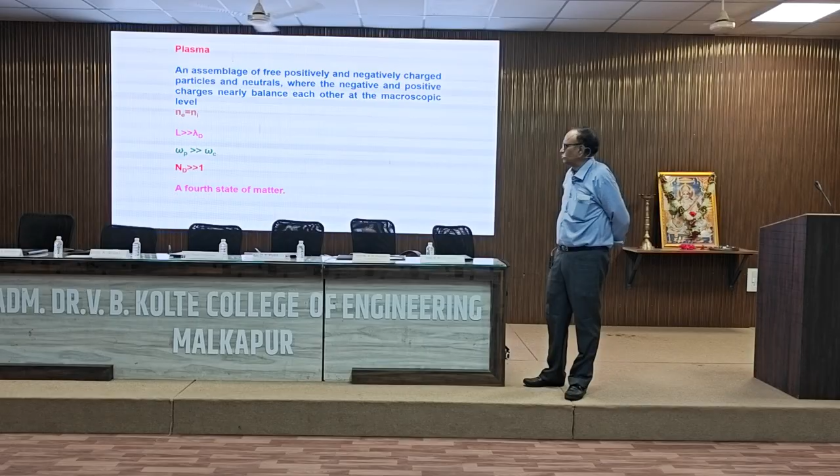We call this removal of the electron from the atom an ionization event, which most of you have studied in your 12th standard. Ionization is basically removal of the outermost electrons from the orbit of the atom. When you generate these electron-ion pairs, one ionization event gives you one electron and one ion. So the number of electrons equals the number of ions, that is Ne is equal to Ni. Ne is the number density of electrons and Ni is the number density of ions, and they must be equal.

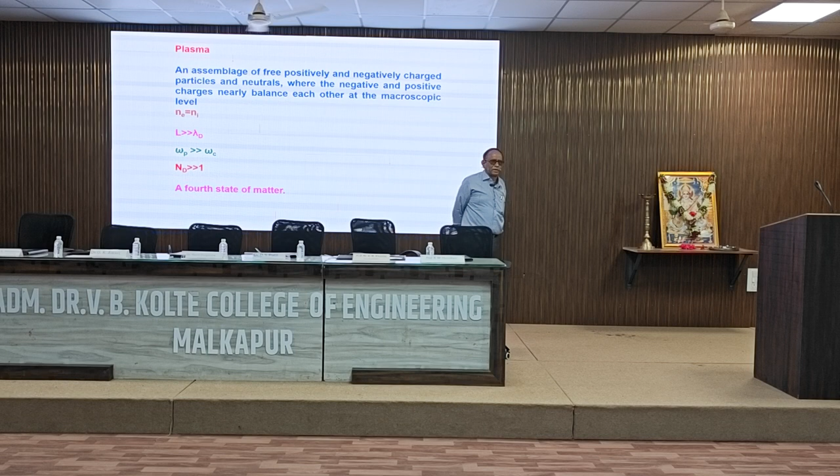Again, we are not talking about a few electrons. In one atmosphere we have 10 raised to 19 particles in 1 cubic centimeter. So when we talk of ionization even at low pressure, reduced from atmospheric, we talk of 10 raised to 12, 10 raised to 13, minimum 10 raised to 10 electrons per cubic centimeter. So a very large number of electrons and a similar number of ions. And when ionization takes place, not everything is ionized. A very small fraction of the atoms are ionized, and a large fraction is still unionized.

So what have you got? You have got electrons, ions, and neutrals. And all these particles are colliding with each other. When they collide, they transfer momentum from one particle to the other. There may be some recombination, there is energy exchange. From the two-body collision problems you studied in your 12th standard, you might know that when particles of identical masses collide with each other, they exchange their momentum completely.

But when electron, I just take example of hydrogen atom. Hydrogen atom, see, it has one proton and one electron, okay? And proton mass is 1800 times more than that of the electron mass. So ion is going to be 1800 times higher mass than that of the electron.

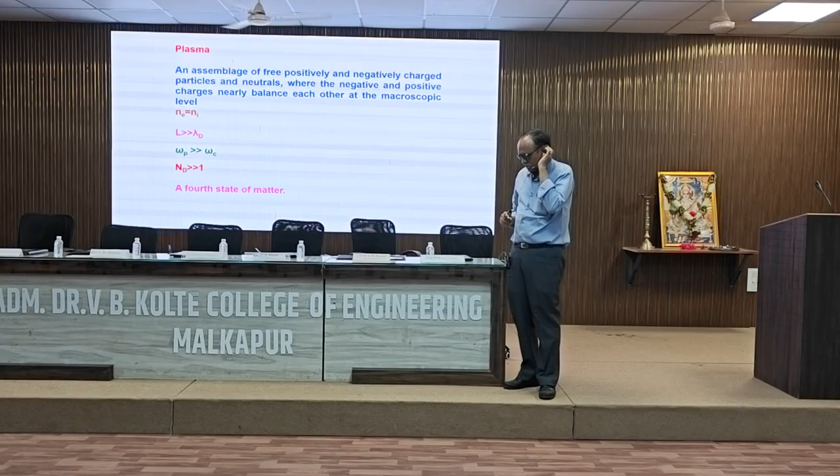Now when this light electron, it is having some energy, but when it collides with the heavy ion of hydrogen, it transfers very small fraction of the energy, and that is evident from the two-body collision kinetics. And at the same time, there is a continuous input of the energy. Now, from where is this input coming?

Now I will come to what is plasma. If you see the popular books, you will see that plasma is defined as the fourth state of matter. What is the first state? Solid. You put energy into solid, it will become liquid. If you put more energy into that, it will become gas. When you put more energy into that, the gas will be ionized.

Simple is like you take ice, water molecule. It is at low temperature, it is solid. You heat it, it becomes water. After that, it becomes steam, and you go on dumping energy into that. It will go into hydrogen, oxygen, hydrogen ion, electrons, and all sorts of things. So this state of electrons, ions, and neutrals is nothing but your plasma state.

Now this plasma state has to have certain conditions. As I told you, we are talking of, in 1 cubic centimeter, even though the degree of ionization may be less than 1%, almost 10^8 to 10^10 electrons, similar number of ions and remaining neutrals. So all these particles now behave collectively. Electrons are lighter mass particles, ions are heavier particles. So electron cloud and ion cloud oscillate with respect to each other.

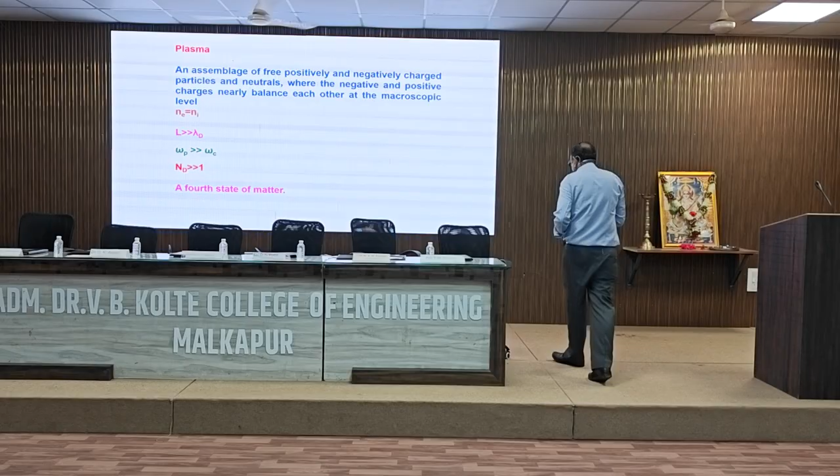Perturbation means in terms of potential, like putting some electrode onto which you put some voltage. If it is negatively biased, it will repel the electrons and attract the ions. If you put positive potential, it will be surrounded by the electron cloud, and the effect of this positive potential will not be felt by the remaining plasma particles. So the length of the plasma medium should be very, very greater than the perturbation length, that is lambda d. I think this is not working.

Lambda d is the perturbation length. Then plasma frequency, that is the electron cloud oscillating with respect to the ion cloud, should be very, very greater than collision frequency. And if you take a sphere of radius lambda d, the number of particles in that sphere, basically electrons, should be very, very greater than 1 for that shielding to be effective. And again, it shows the collective behavior.

That means if in this room we have the plasma and something happens in that corner, the effect will be felt there. Because now you are talking about a charged particle state, where you have electrons, ions, excited neutrals. Why have they become excited? Because of energy transfer from one particle to other particle. And in this process, the charged particles are moving, so they generate electrical currents.

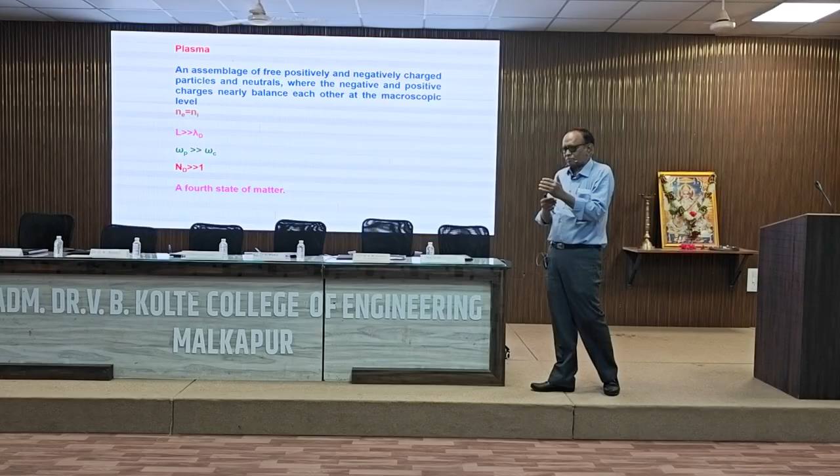When there is an electrical current, that is associated with a magnetic field. So basically, you are ending up with the electromagnetic field in the whole plasma volume. So these particles move under the influence of this electromagnetic force, and they behave in a collective manner. That is evident from these parameters I defined, plasma frequency and all these things.

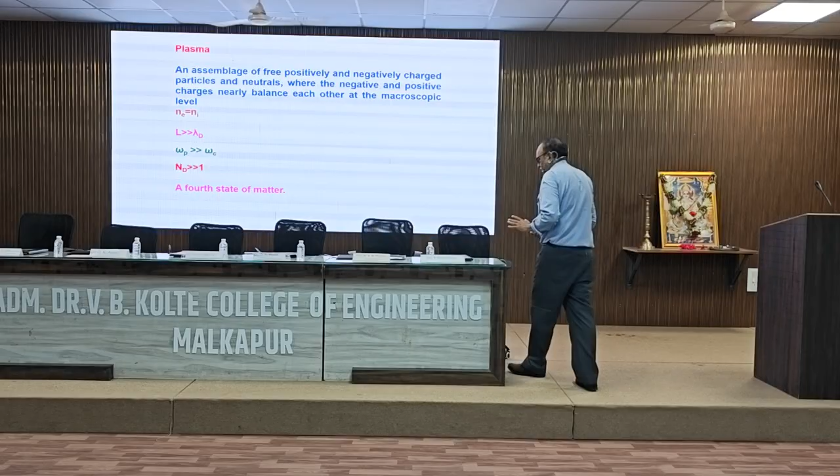Now I will come to these plasmas. The simplest example that I can give you is the plasma that is generated in your electrical tube light.

Because you have the two electrodes under reduced pressure, there is a gas, you put in the electrical energy, and because the gas is under reduced pressure, due to the ionization created by background radioactivity or cosmic radiation, electron-ion pairs are generated. These electron-ion pairs are attracted towards the respective electrodes, and while transiting through the space, they gain energy from the electric field, they become energetic, they collide with the remnant particles, and in that process they create further ionization, that is, multiplication of the ionization.

Now see what is happening. I have told you that when the electron collides with the ion, it gives a very small fraction of its energy; the remaining energy it retains. When the ion collides with the neutral, it transfers all its energy. Now these particles are continuously colliding with each other. What is the effect of that? Electrons in the low pressure environment become more energetic, because in collisions they transfer a very small fraction of the energy and retain the maximum energy, again gain energy from the field, again collide, and in that process, in this volume, you end up getting a

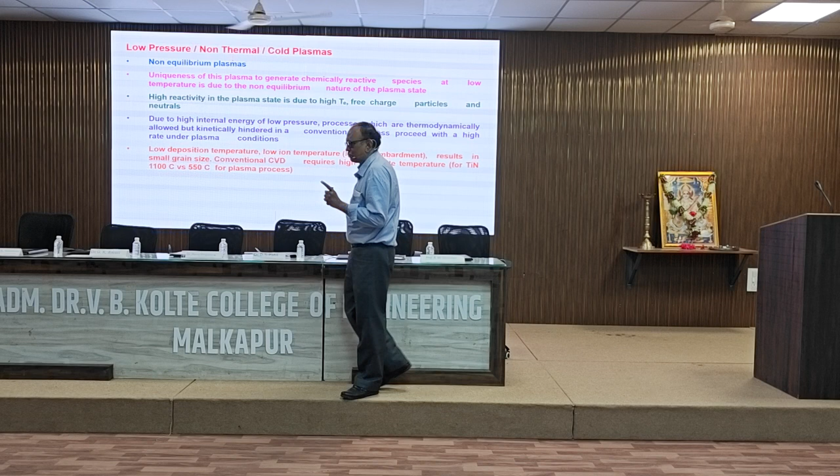separate cloud of electrons. If you define the Maxwellian average energy, then you have one Maxwellian for the electrons and another Maxwellian for the ions and neutrals. So when we talk of the energy of these particles, the energy equivalence is always spoken in the plasma language as the temperature of those particles. If you have 1 electron volt temperature of the electron, that is high energy; it is equivalent to 11,600 degrees Kelvin.

But don't worry about this 11,600 as 1 eV, because the electron temperature in your tube light plasma is almost half eV. Now you will say, with such highly energetic electrons, why is the tube not melting? It is not melting because even though the energy of the electrons is very high, the amount of energy exchanged with the walls is very, very small, because the mass is very small and the momentum exchange is very, very small. As an effect of that, you get a low pressure non-equilibrium plasma.

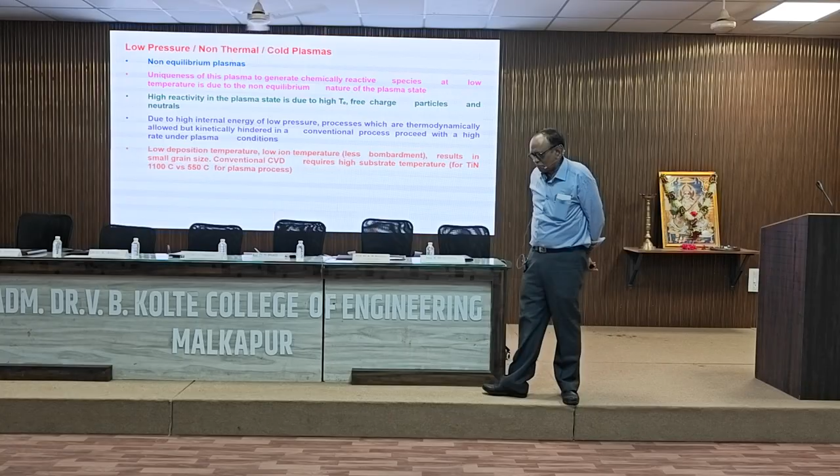What is equilibrium plasma? Equilibrium plasma is the one where all species have the same energy, the same Maxwellian. Here you have two Maxwellians, one for electrons and one for ions and neutrals. So that is how you end up getting non-equilibrium plasma. Now, what is the uniqueness of this low pressure plasma? It's basically a non-equilibrium plasma. Because of this non-equilibrium nature, it has the capability to generate chemically reactive species at low temperature.

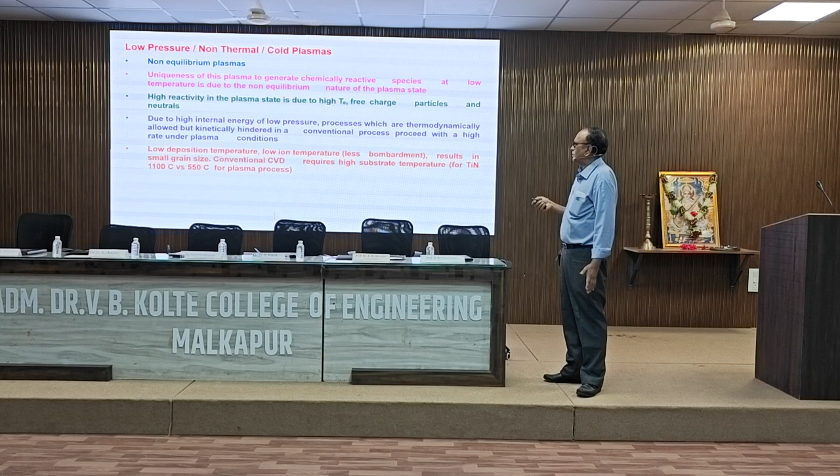And it also leads to high reactivity in the plasma state, because the electrons are in a very highly energetic state, high electron temperature, and then your ions and neutrals. You are talking of highly energetic electrons, ions, and neutrals having different temperatures. This is a state of high internal energy, because you have all the charged particles with very high energy. In this state of high internal energy, processes that are thermodynamically allowed but kinetically hindered proceed at low temperature. I will give you an example.

You have seen watch cases coated with titanium nitride, a golden yellow coating. How is this golden yellow coating given on steel? It is given even on cutting tools used in your workshop. Titanium tetrachloride, nitrogen and hydrogen, or titanium tetrachloride and ammonia, are decomposed at a temperature of around 1100 degrees centigrade, where titanium tetrachloride decomposes to titanium plus Cl minus. Hydrogen also undergoes decomposition to H plus, and nitrogen to N plus and electrons. Then the nitrogen reacts with titanium ions to form titanium nitride.

And that is how you get those golden coatings on your watch cases or even your tool steel workshop components. If you do this by conventional means, applying temperature in a furnace and decomposing the precursors, you need temperatures of the order of 1100 degrees centigrade. Whereas with plasma, you can deposit excellent quality titanium nitride at 550 degrees centigrade.

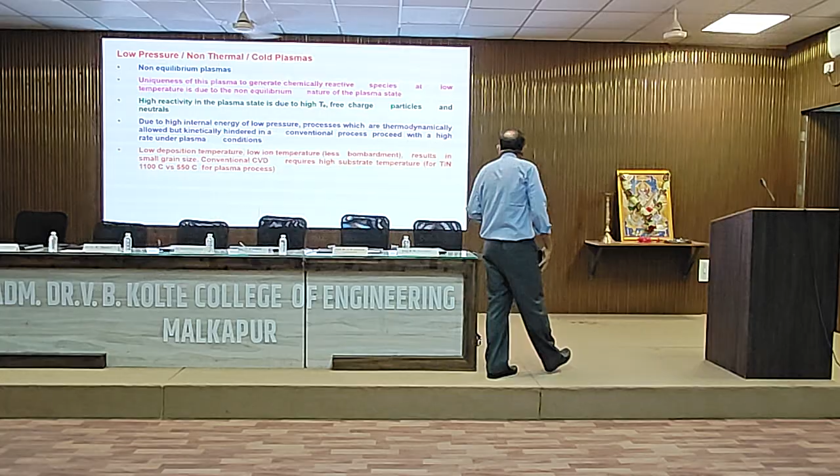So if you derived some advantages because of microstructure modification, the steel will get annealed out and you will lose those advantages. So it is always desirable to have lower deposition temperatures, and that is possible using this plasma. So I have just shown you one example.

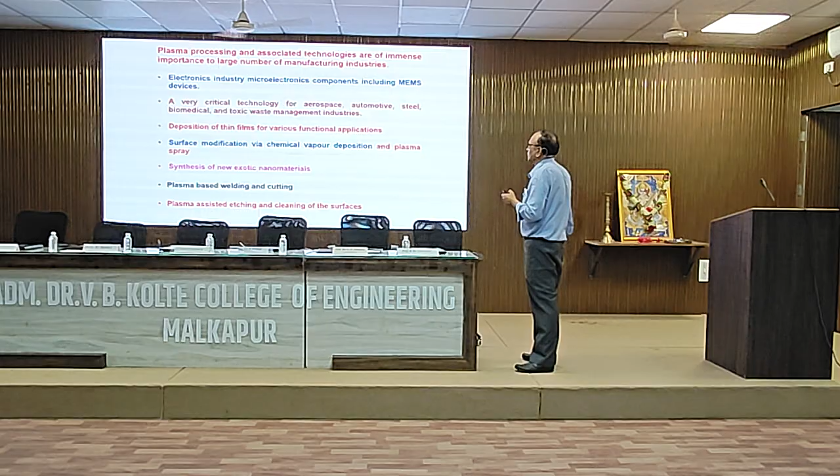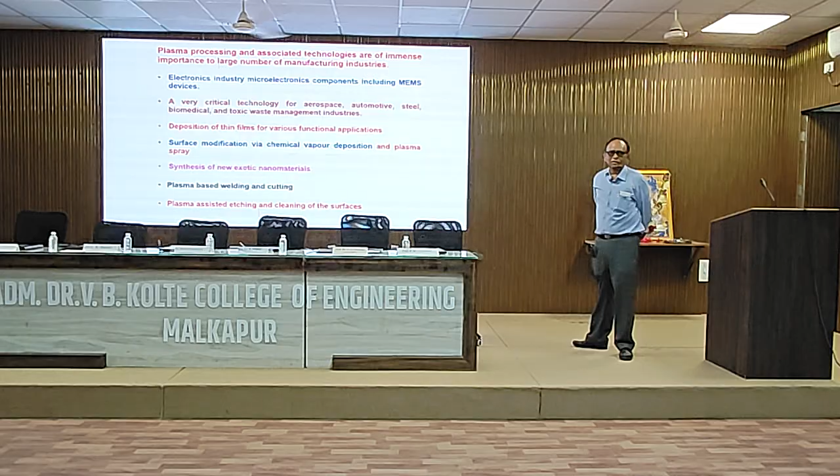Another thing, this plasma processing and other associated technologies have a very large number of applications in manufacturing processes. Number one is the electronics industry, microelectronics components including micro electromechanical devices. It's a very critical technology for aerospace, automotive, steel, biomedical and toxic waste management. Deposition of thin films for various functional applications. See, this is a very hot field.

In fact, today plasmas have the maximum number of applications of any tool. Actually, it's used as a manufacturing tool for most industries. And the semiconductor industries rely solely on this plasma processing. Because if you want to deposit solar cells or diodes, triodes, transistors, ICs and all this, you need plasma processing at each and every stage. So it has become a very vital component for the semiconductor industry.

Then again, surface modification of components via chemical vapor deposition and plasma spray process. I do not know whether I will get the time today to discuss plasma spray, but whatever is possible, I shall talk on the low pressure plasma side. Then synthesis of new exotic nanomaterials, plasma based welding and cutting, plasma assisted etching and cleaning of surfaces, decontamination of surfaces including food and agricultural products. It has become a very hot field nowadays, processing of foods by cold plasmas.

Then plasma polymerization for making corrosion resistant coatings or even hard coatings. Large area deposition of good quality coatings of diamond like carbon, cubic boron nitride, super hard, nanocomposite, biocompatible coatings, carbiding and nitriding of surfaces, processing of polyesters and synthetic fibers, nanoparticle generation, chemical vapor infiltration for making metal matrix composites, plasma etching, sputtering, and many more applications, including plasma medicine. That's a field which is now emerging.

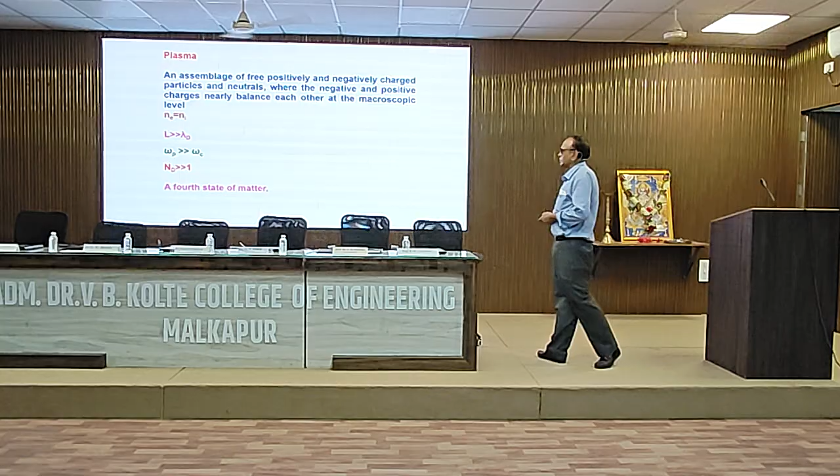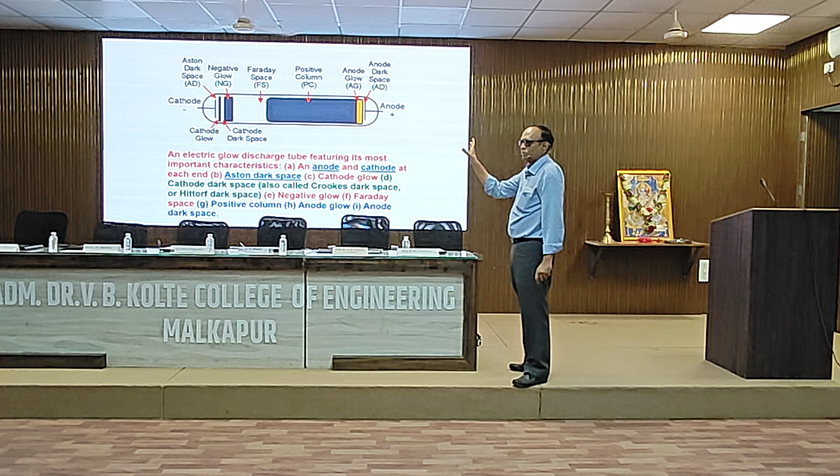Again, this plasma generated in a simple device like a low pressure gas tube with two electrodes, you will see something like this. The actual picture is like this, see, you have some regions which are brighter, some regions which are dark, and all those kinds of things.

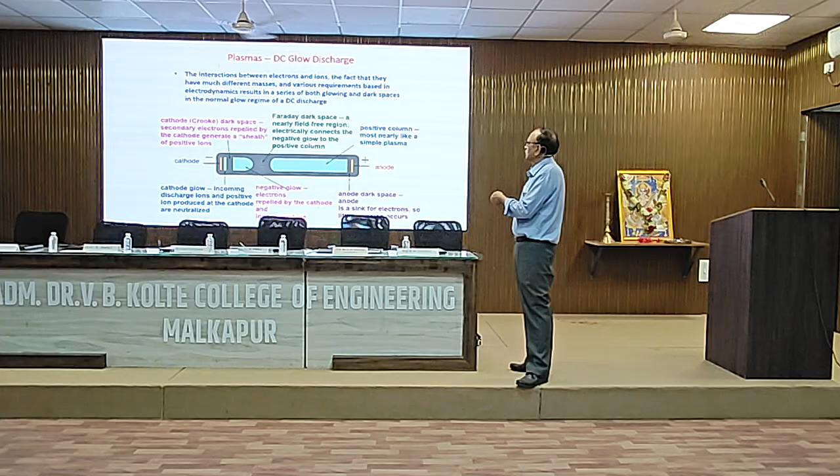And this is because when the electrons start from the cathode, they go on gaining energy. When they become more energetic, they create ionization. Because of the ionization, they lose energy again, and with low energy they cannot create ionization. They gain energy, and again ionization happens. Whenever there is ionization, there is recombination also, and recombination generates light. That is why you get light in different regions in the discharge tube. And these dark spaces are named after the scientists who discovered them.

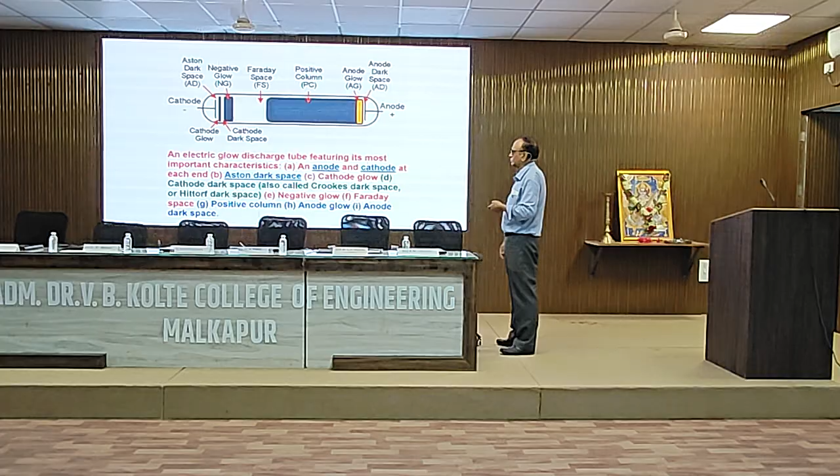I will not go through these details because that will be too much for you. But I will go through this slide. See, from the cathode, as you start towards the anode. Now, once the plasma is generated, you have electrons, ions, excited neutrals, and these particles are going towards the respective electrode, and they have different mobility. Electrons, being the lighter particles, have very high mobility. Ions, being sluggish, heavy particles, have a very slow velocity.

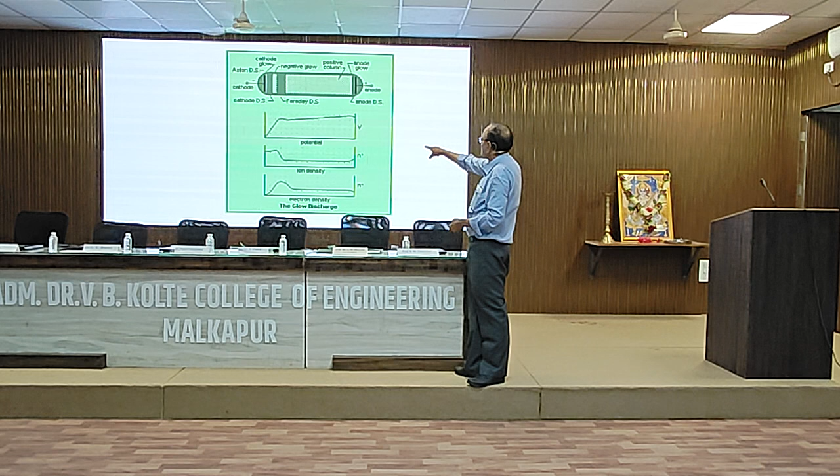And because of their very slow velocity, they move slowly towards the cathode, resulting in this negative glow discharge. And if you see the potential that is applied across the tube, the potential division is shown here. Unfortunately, the laser pointer is not working on this. But this is the potential applied between the two electrodes, and maximum potential will appear across this negative glow and the cathode, and the remaining potential will appear across the full tube.

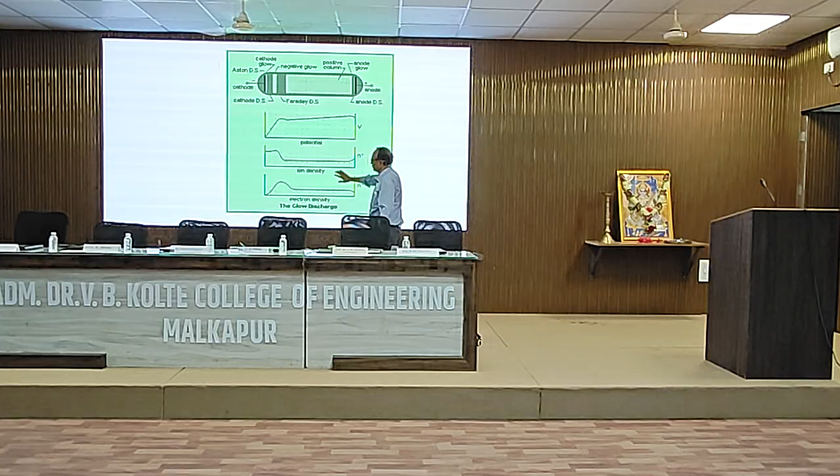This is the region which is the positive column and which represents basically plasma. Negative glow is the region representing positive space charge, which is getting accumulated towards the cathode. Now, again, this potential and all these things, I will skip from this discussion.

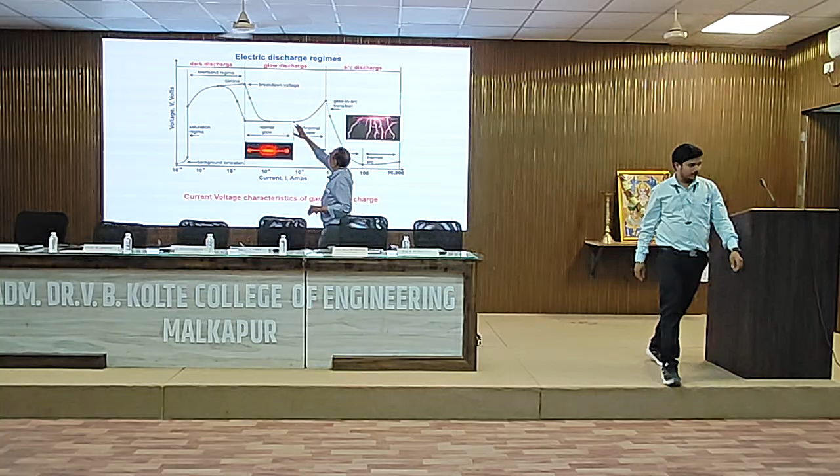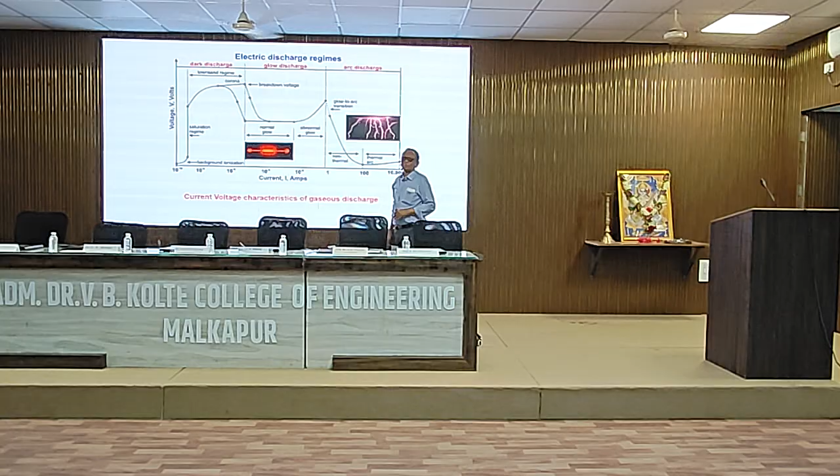Now all these have their different applications. The abnormal glow region is used for plasma nitriding and processing applications, because you have very high current density, and the arc region is used for plasma spray applications. If time permits, I will show you at least some figures on that.

Okay, now the simplest one, a very simple example. You have two electrodes, and a plasma is generated, argon plasma. Argon is a benign gas. This is the cathode, this is the anode. Once the plasma is generated, the ions get attracted onto the cathode. Ions, being heavier particles, exchange momentum, and as a result, cathode material comes out, and you can deposit this cathode material onto a substrate located at the anode.

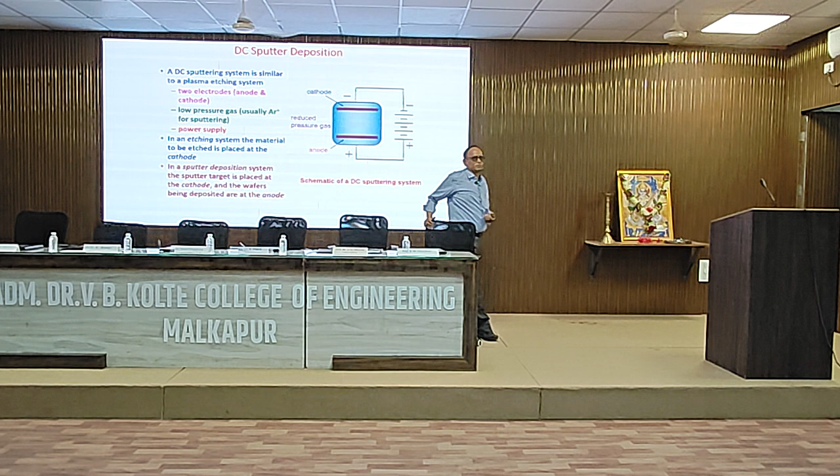This process is very routinely used in the semiconductor industry for making electrical contacts, or for fabrication of ICs, making metallic thin films in the IC and so on. Now, this two-electrode configuration is okay for simple metallic film deposition. Insulators cannot be deposited by this process, because in an insulator you cannot sustain that current.

And to increase the current density, you put magnets behind the target, your cathode, so that the flux lines are like this, and in the vicinity of the cathode, the electrons will gyrate around these field lines. Because of this gyration, they are confined there and get energy from the field. When they become energetic, they create more ionization, meaning more ions, which can hit the target and increase your deposition rate.

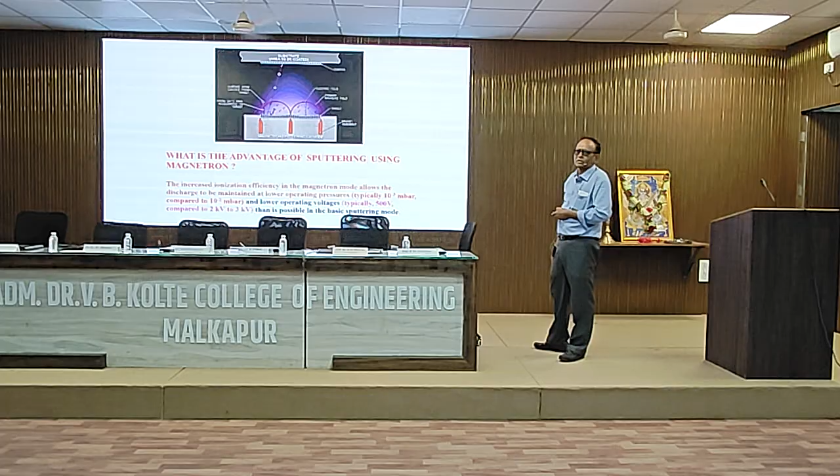This is an industrially used process in almost all semiconductor labs and most industries working on hard cutting tools and those kinds of things. Now, the role of plasma, as I explained in the beginning: you have very highly energetic electrons, very low energy ions, and these electrons help you decompose the gaseous species very efficiently.

So, because of that, you end up getting low deposition temperature and effective ionization of your gas, etc. I will skip this discussion because that will be too much for you. I'll just show you some picture or some example.

Now, this is one example I have taken, which is used by the steel industry. You know that steel as such is a very hard material. Its hardness is around 2 gigapascal. Okay, and how will you define the hardness? Hardness is defined as the resistance offered by the material for the pointed load. That means if there is some tip with sharpness, it is pushed onto the steel surface, it makes some impression. So that load divided by that area of impression, that will give you the hardness.

Now this hardness for steel is around 2 gigapascal. Okay. Now you know steel has a composition of iron, a very small amount of silicon, chromium. Chromium is there, iron is there, silicon is there, and there are many other metals. Now if I can diffuse some nitrogen into this steel by some means, then I can make the nitrides, like iron nitride, chromium nitride, silicon nitride, and all these nitrides, they are ceramic phases. They are ceramic phases, covalently bonded materials, with high hardness.

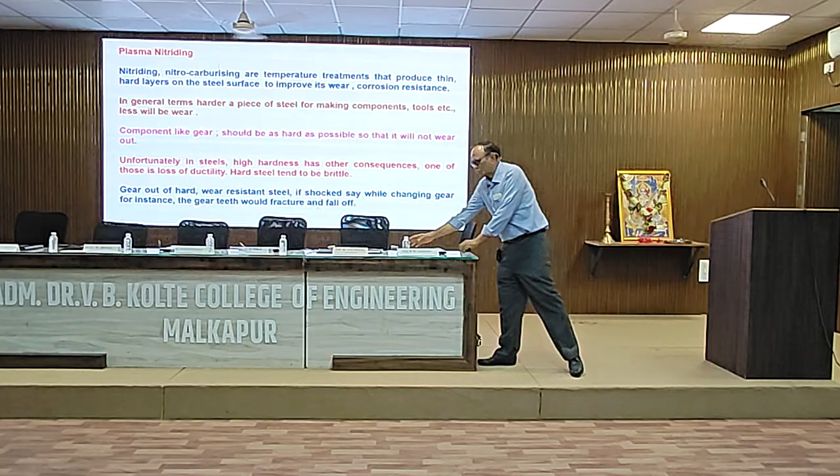Now, you will ask me, what is the use of this nitriding and all these things? Yes, nitriding has a very large number of applications. I will tell you just one example: the automobile industry. In the automobile industry, you have gears; you are using these car gears continuously, and so they undergo wear and all those kinds of things.

Now, if you are using some cutting tool in the workshop, and the tool made of stainless steel is lasting for 1 week, every doubling of the hardness of that tool will enhance its life by 10 times. That is a thumb rule. There is no mathematical equation, but that is generally the observation. So imagine if I increase the hardness from 2 gigapascal to 10 or 8 gigapascal, how much will be the life increase of that particular tool.

So now if I want to have a very small amount of wear on that component in service, I try to make it hard. Now yes, I can make it hard, but out of that hardness, the fracture toughness of the material comes down. Because the material becomes hard, but its fracture toughness, that is the ability to absorb the shock, gets reduced. That is because of the covalently bonded material that is formed onto the surface of the steel matrix.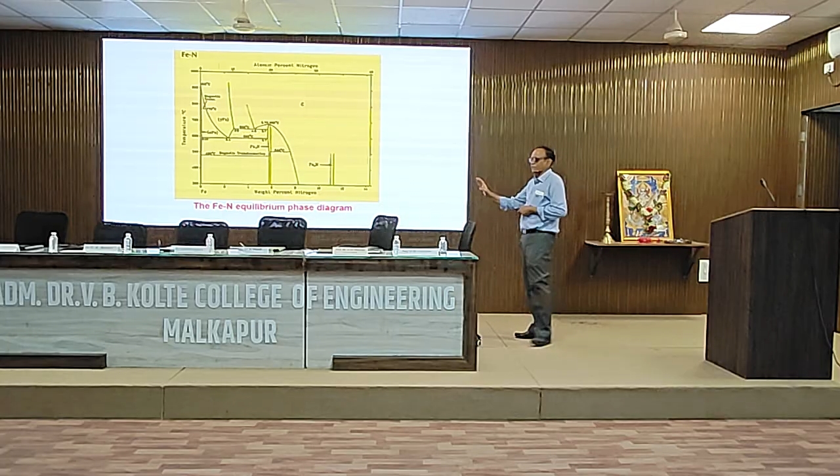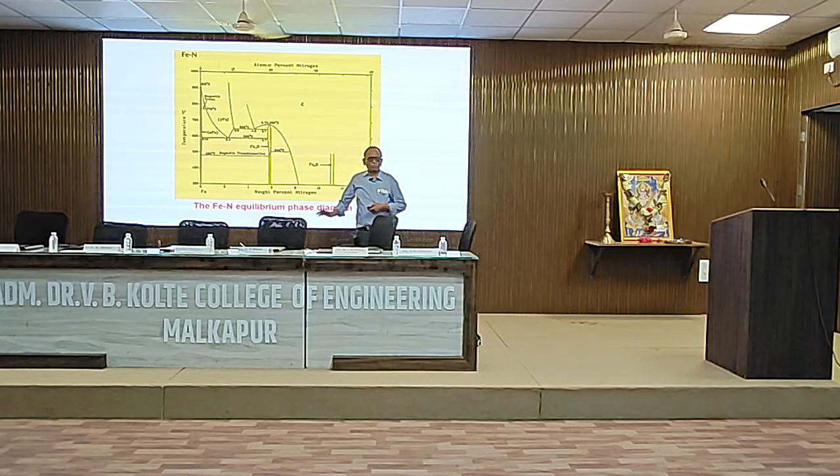Again, this is a phase diagram. I will not explain this because it will be too time consuming. So basically, depending on the temperature of treatment and all these things, you get different phases of nitride. But don't worry at this moment, because that itself will take one full lecture. Okay.

Basically, for this nitriding process, three processes were used. Gas nitriding, in which ammonia is decomposed catalytically onto the hot steel surface. Molten salt bath nitriding, where cyanide mixtures are in a molten state and components are immersed into that at high temperature. But the cyanides are poisonous compounds, so that process has been environmentally banned. And the third process is plasma nitriding, low pressure plasma nitriding, that is the one which is used.

So basically, in gas nitriding, you have the components kept here in the chamber. The chamber is heated to around 500-600 degrees centigrade, and when you feed your ammonia, it undergoes catalytic decomposition. All these nitrided cases are formed onto the component surface. Remaining ammonia is bubbled through the water and dissolved into the water, and you get the nitrided case on the sample surface.

Now, here, by default, you get a mixture of epsilon phase and gamma phase, Fe2-3N and Fe4N. And when there are two crystallographic phases, they have two different coefficients of thermal expansion. So in service, like when you are cutting something with this nitrided component, the two phases will expand differentially because they have different coefficients of thermal expansion.

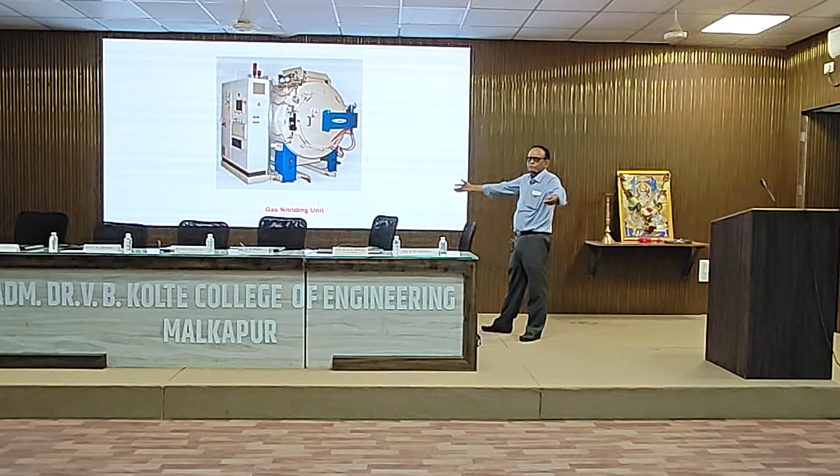And that will develop cracks, and because of this crack generation, there may be peeling off of the nitrided case. So that is why your objective is to get a single phase, and getting a single phase nitride is not possible by gas nitriding, but by plasma nitriding. Now, of course, there are a very large number of gas nitriding units. I have taken these from the literature. Big size components are being nitrided for industrial use.

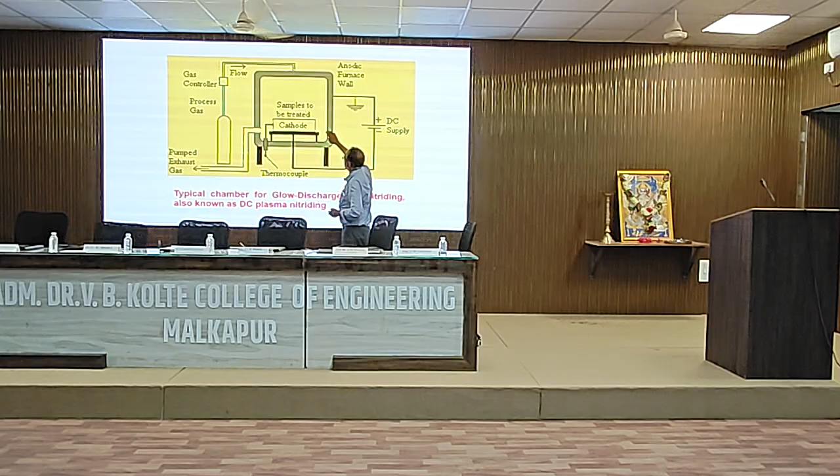Again, in glow discharge nitriding or plasma nitriding, you have the component on the cathode, and the chamber is the anode, which is grounded. You apply the negative potential here, positive is grounded. There is a gas filled, nitrogen and hydrogen, and you generate a plasma containing nitrogen ions, hydrogen ions, and so on. Hydrogen ions will remove the oxides on the steel, and you can have very precise nitriding of the components and achieve a single phase nitride in the case. And this process is now industrially well adopted.

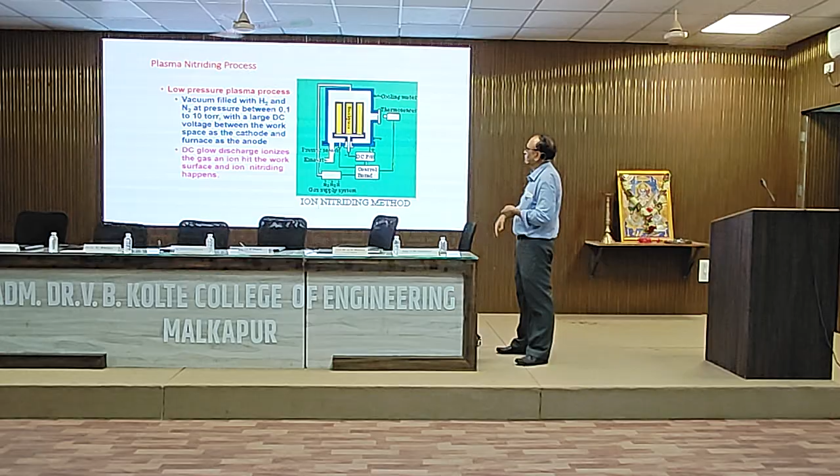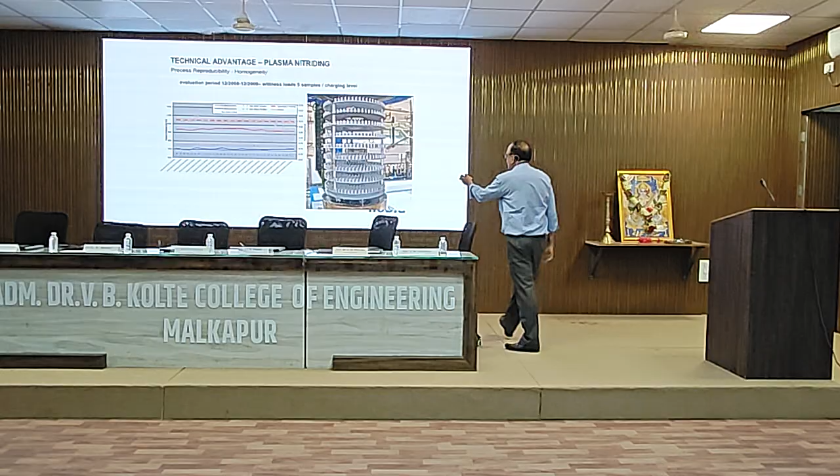This is the process: you feed the gases, and you have a very large number of components, thousands of components, like cutting tool bits, mounted here. This is your cathode, and on that cathode all these things are electrically connected onto the shafts. So your cathode surface area is now this full area. You have to calculate the area, and the outside chamber will be your ground.

You apply voltage; you should have a power supply capable of giving at least 1000 volts and very high current, because a large number of components are there. I will tell you one example. Our nuclear submarine people approached us. They wanted plasma nitriding of a steel pipe which was 40 meters long. So they asked whether we can do that.

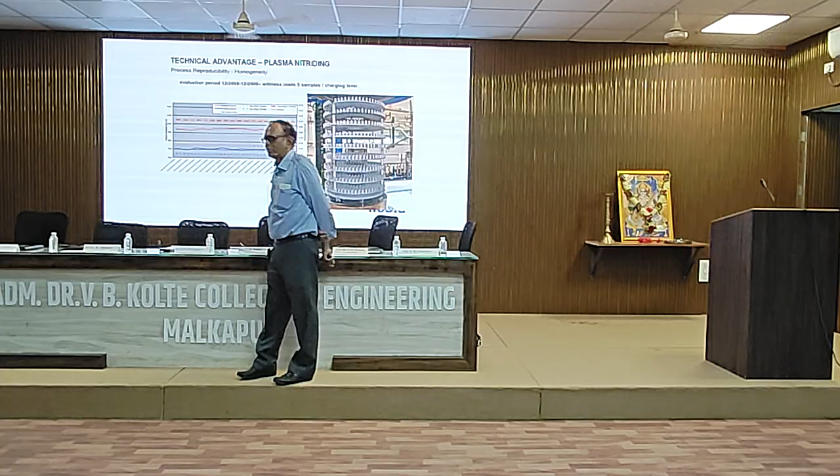Yes, in principle it is possible, but power supplies capable of supplying current of the order of 1 to 5 milliampere per centimeter square cannot be developed here. So we offered to do it in pieces if they could accept that. But they said this nitrided pipe is going into the nuclear submarine, and it has to be a single piece. A pipe cut into various pieces is not acceptable for the nuclear submarine, because it is a defense application.

So see, imagine there is a very big challenge in this whole thing. Now these gears and all these things, you have all these heavy duty gears, and all the plasma is generated into the chamber, and this plasma that is generated here has nitrogen, hydrogen ions and all these things, and these components are negatively biased because they are on the cathode. Cathode is at a negative potential, so it will attract nitrogen ions and give you the nitriding.

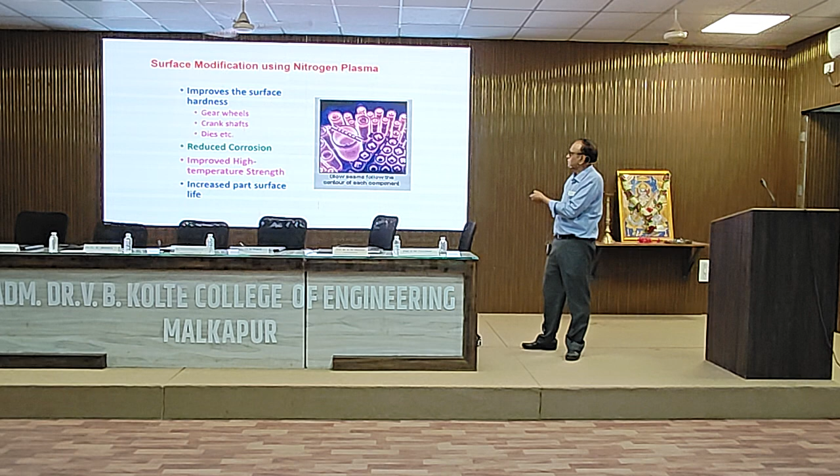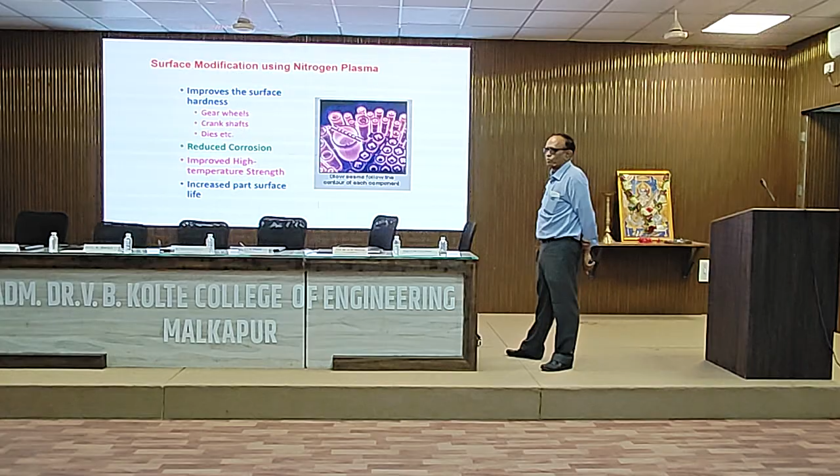See, these are again gear cutters while plasma nitriding. Then various automobile components are being nitrided. Then what is the advantage of this nitriding? It improves the surface hardness of components like gear wheels, crankshafts, dies. It gives you reduced corrosion. Because see, Navy people, submarine people, they wanted to nitride the components because of corrosion aspects. Then it improves your high temperature strength, and effectively it increases the part surface life.

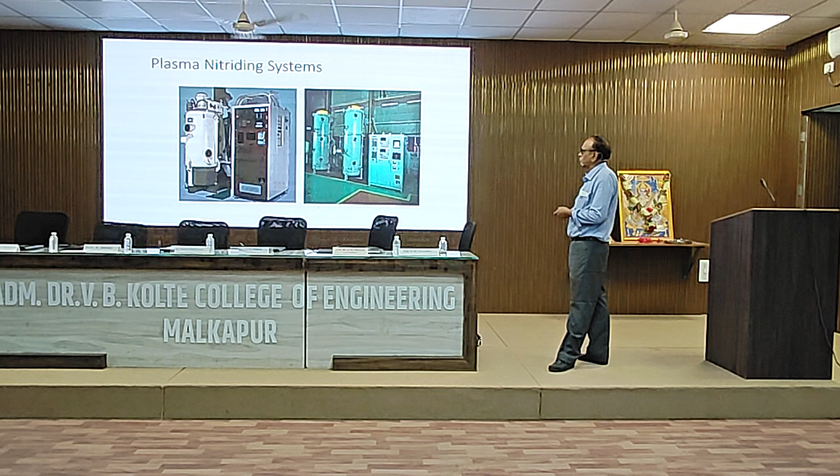Okay, I will just keep this because this is how the industrial plasma unit looks like. You have the plasma chamber and this is the power supply console. Carbonitriding is, if you feed carbon and nitrogen together, you can form some carbide and nitride mixed phases. But again, they are hard phases because they are ceramics. So this process is called carbonitriding, and there is another process called carburizing. Again, an industrially used process. This is a plasma based process.

Again, a component is heated to 1000 degrees centigrade in a furnace. A plasma of methane is generated, and on a high temperature surface, the carbon and the ions diffuse into the surface, forming precipitates in the matrix. At the same time, they form some hard carbide phases on the surface. So it imparts high hardness, and because of the precipitate hardening, it also gives inherent hardness to the core.

Okay, this I will just skip. Now these are all variations. Active screen, if you go into a very big detail of plasma nitriding itself, I take 2 lectures when I offer a course in IIT Bombay. So plasma nitriding, one topic, needs 2 lectures, so it will not be possible to discuss everything here.

But active screen plasma nitriding is like, you have this cathode on which you mount your samples, and on that there is a mesh, and that mesh is made the cathode. There is an inherent advantage of this, because no high voltages appear on the cathode, that means on the material. Basically, if there are narrow holes in the component, they give the hollow cathode effect. The electrons get trapped into that. The 2 walls have the same potential, and electrons are trapped between the 2 walls.

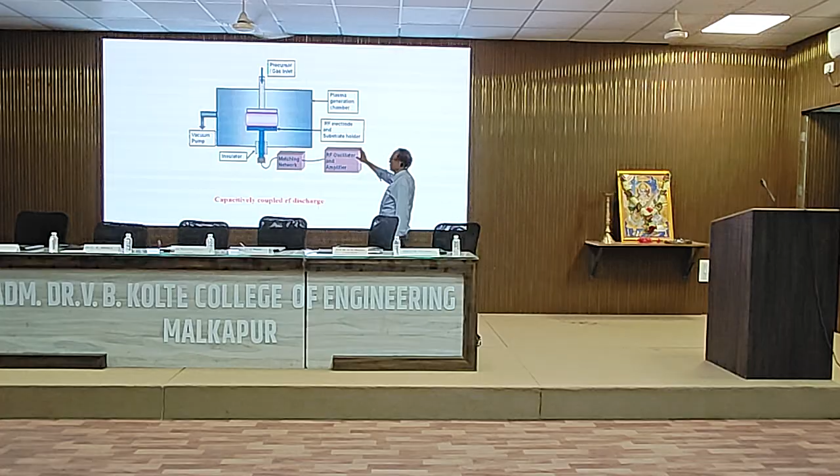How is it done? You have 2 electrodes, and in these two electrodes, rather than connecting your DC, you put a radio frequency generator, with typical frequency 13.56 megahertz, 13.56 into 10 to the 6 hertz. This radio frequency power is coupled to the electrode. Inside the chamber, you have the gas. Radio frequency power is coupled through the matching network, which is nothing but an LC circuit combination. So basically, you have fed the RF power, which is oscillating, and there is a gas under reduced pressure.

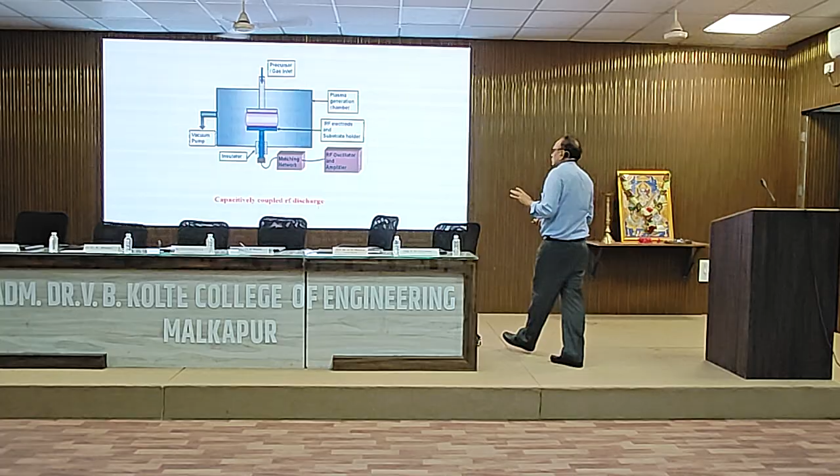Because of cosmic activity or background radioactivity, whatever ionization is formed, the electrons are subjected to this radio frequency energy. They will undergo acceleration, but again they will undergo deceleration if their direction of motion is not changed. But because there are a large number of collisions, when the electron goes onto this cycle and its direction is changed, then again it is favorably oriented for acceleration. So in that process, it will go on gaining energy, and when it gains sufficient energy, it creates the ionization. Once this ionization is done, this ionized plasma can be used for various applications.

One classic example is your sputtering process, where you are removing the material by energetic argon bombardment and then depositing the sputtered material from the cathode. It cannot take place if your target is insulating. But in semiconductor manufacturing, like making ICs, you have a large number of insulators that need to be processed, like depositing SiO2, Y2O3, and all. If you want to deposit a capacitor while making the IC, then you want to sputter SiO2. For giving anti-reflection coating on solar cells, you need to deposit Si3N4, silicon nitride.

These are all insulating phases. And because they are insulating phases, they cannot be sputtered by DC process. So here in radio frequency process, you have the radio frequency power that is coupled to the chamber here through a blocking capacitor. And what is the function of this blocking capacitor?

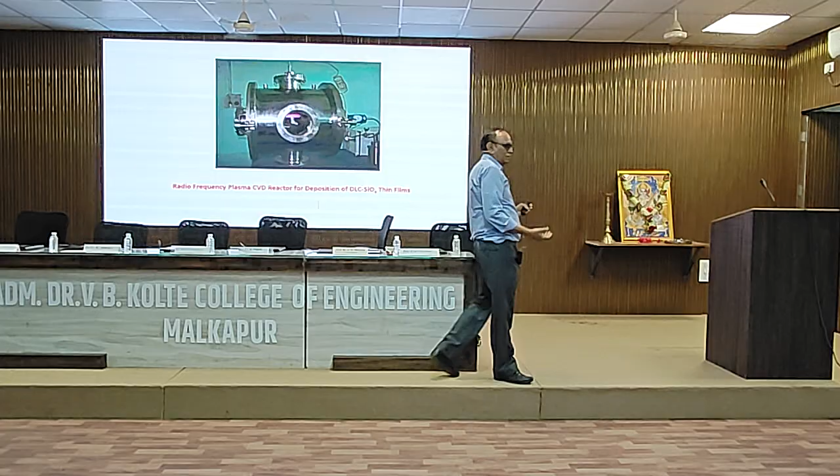These military people on battle tanks, etc., are using germanium optics, which is transparent to IR, because they are basically night vision devices. These battle tanks have to go through hostile environments, sand particles, dust. So if you are using a highly polished germanium surface, it will get damaged, and your image quality will come down. So they wanted an infrared transparent coating which is hard and can be deposited on germanium mirrors. We developed this process and transferred it to defense people.

Basically, the red one that you are seeing is the plasma. By using a mixture of methane and hexamethyldisiloxane precursor, we have developed this process. We have developed this technology for 8-inch diameter coating, and this was given to DRDO people for further application.

Another thing I will show you is another class of plasma, that is inductively coupled plasma. Rather than giving RF power on two electrodes, I have a quartz or dielectric cylinder with a copper coil wrapped on it, and I put the RF energy into this copper coil. This is an RF signal, sinusoidally varying at 13.56 × 10⁶ hertz frequency.

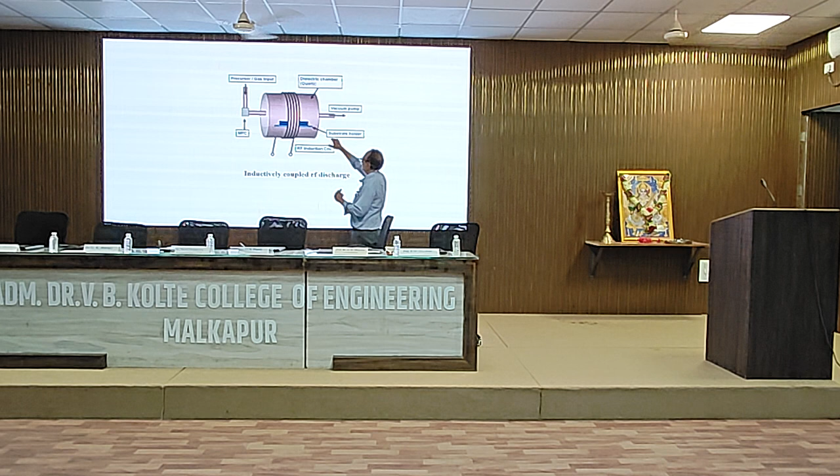This RF current going through the coil will generate the axial oscillating field. And this axial oscillating field can be sustained only when there are currents to sustain it. Now from where will those currents come? Currents will come because there is a gas inside this cylindrical volume. This gas is ionized because of stray ionization. The electron-ion pairs generated, the electrons will undergo acceleration under the influence of this generated field.

See here, you have the copper coil wrapped around the quartz or dielectric tube, and this is the electric field generated out of the oscillating magnetic field. Because of these electric fields, the electrons undergo acceleration, gain energy, become energetic, and can sustain the plasma. Now, this technology is used nowadays